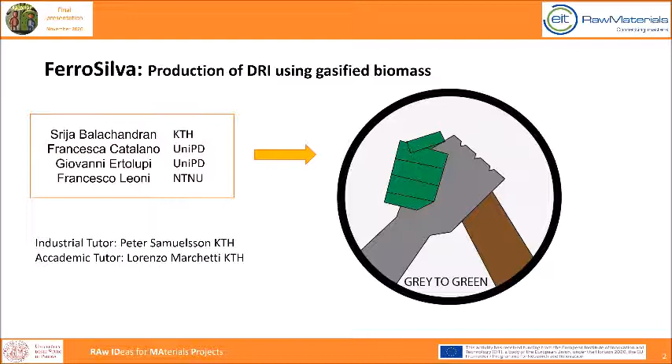So we are group 6, and I'm going to introduce you to the topic of our project, whose name is FerroSilva. FerroSilva is a project that has its origins in the Royal Institute of Technology of KTH in Stockholm. And the idea is to utilize the chemical properties of biomass to create a fossil-free iron raw material.

Steelmaking is the process of producing steel from iron ore or scrap. Today, there are two major commercial processes for making steel. They are called basic oxygen steelmaking, which has liquid pig iron from the blast furnace and scrap steel as the main feed materials, and electric arc furnace steelmaking, which uses scrap steel or direct reduced iron, DRI, as

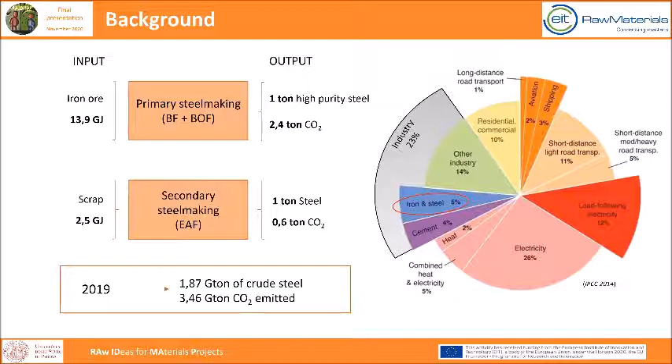the main feed materials. As you can see from this graph, the production of steel plays an important role in the production of carbon dioxide. The demand for steel is also growing, and the amount of scrap is not enough to satisfy this trend. Moreover, the steelmaking industry plays an important role in the world economy. It involves almost 100 million people, and it's worth 3.8% of the global GDP.

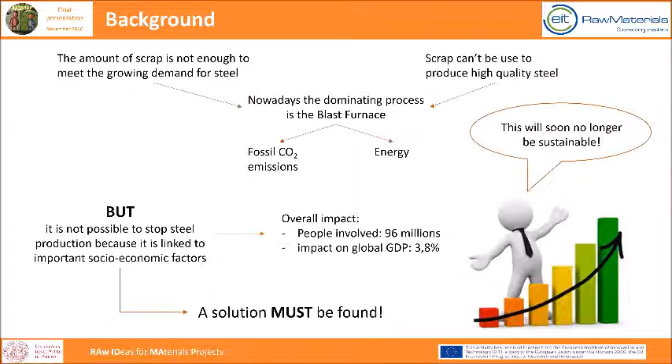In order to drastically reduce the overall CO2 emissions from the production of steel, the development of breakthrough technologies is crucial. Today, a large number of promising projects are ongoing in different parts of the world. One of those is FerroSilva, whose scope is to create a sustainable steel production process, preserving the typical advantages of secondary process, also in the production of high-quality steel.

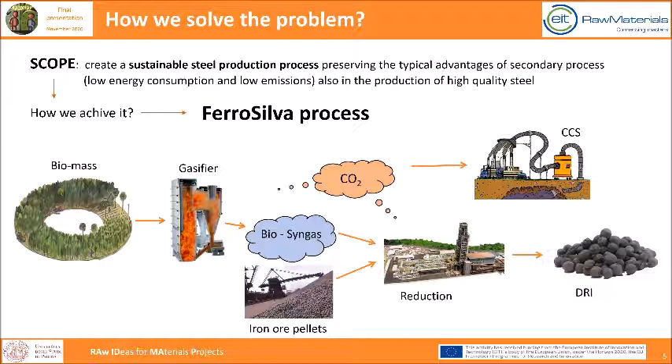By combining the gasification and reduction processes with carbon capture and storage systems, a carbon sink can be realized, and this brings to net negative carbon emissions. So the technology for the FerroSilva concept is available today, but the combination is new.

This slide gives an overview of the technology readiness level for each one of the processes employed in the FerroSilva process, which are gasification of biomass, reduction of iron ore to produce DRI using natural gas, and finally the combination of the two, which means reduction of iron ore to produce DRI using gasified biomass with integrated sub-processes.

We consider the first one, the gasification of biomass, to be at a level 8 of readiness. This means that the technological systems are complete and proven in smaller industrial scale. So given that the requirement for FerroSilva was around 100 megawatt, we believe that 8 can be assigned with a good level of confidence.

The second one, which is reduction of iron ore to produce DRI using natural gas, is currently at a level 9 of the scale. This is because the Midrex process is industrially proven, and it has been used for around 50 years using natural gas so far.

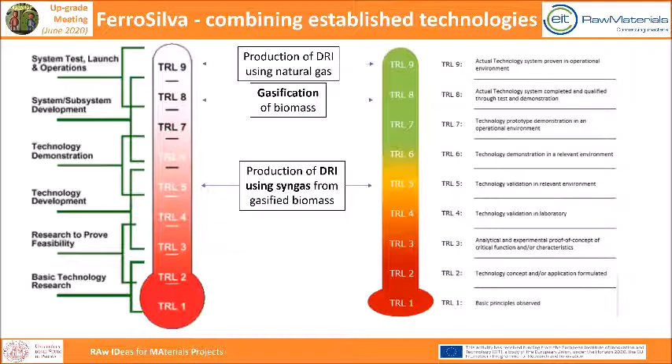So now I leave Francesca going ahead with the presentation. Please, Francesca. Thank you, Francesco.

Next slide, please. The choice of the gasifier was not easy, as there are many existing technologies, and it was necessary to find the one that allows us to obtain the syngas with the characteristics required to produce DRI. So, to do this, we built an evaluation matrix giving different weights to each feature in order to enhance the most important ones.

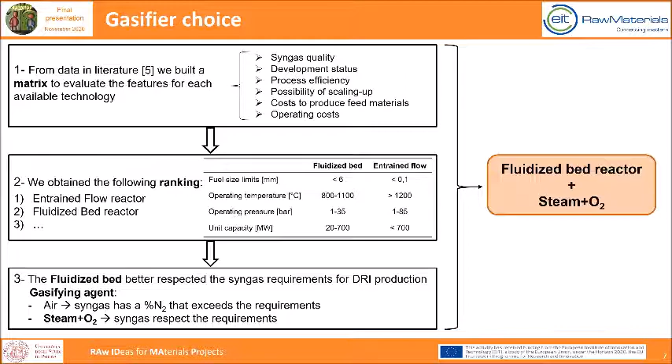In this way, we obtained a ranking of the technologies that allowed us to identify the two best technologies. We then determined which one was the most suitable by comparing them with the design requirements, and the fluidized bed reactor was the winning technology. Similar reasoning was used to decide which gasifying agent to use, and steam plus oxygen was the best choice. Next slide, please.

Okay, to make the reduction, we have chosen to use the Midrex process because it has a lot of advantages. It's the most common and consolidated way to produce DRI. And when combined with BECCS, it leads to the best net negative emission balance. And it's a flexible process since it has few requests on the gas quality.

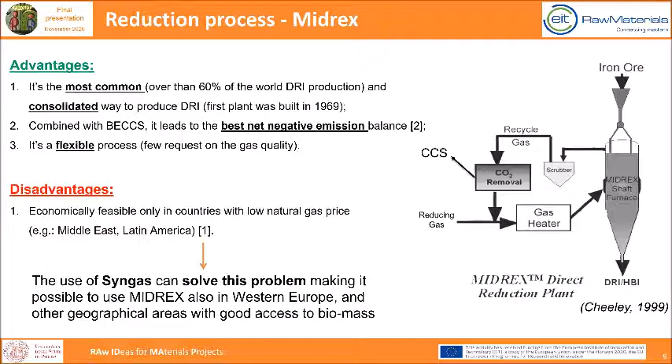On the other hand, it is economically feasible only in countries with low natural gas price, but the use of syngas can solve this problem, making it possible to use Midrex also in Western Europe and other geographical areas with good access to biomass. Giovanni, please.

Okay. We did this slide just to give the dimension of the plant we are speaking about. Our case study is about a 500 kiloton per year plant. But just to study the possibility of upscaling, we refer the model to the production of one of the largest steel plants in Europe. The production of 6,000 kiloton per year of iron, as it was in Taranto, will need a 12-times bigger plant.

In both dimensions of the plant, there are no problems related to the availability of biomass. Of course, a plant of 500 kilotons is preferable because it allows a supply of biomass at a short range and therefore lower emissions related to transportation.

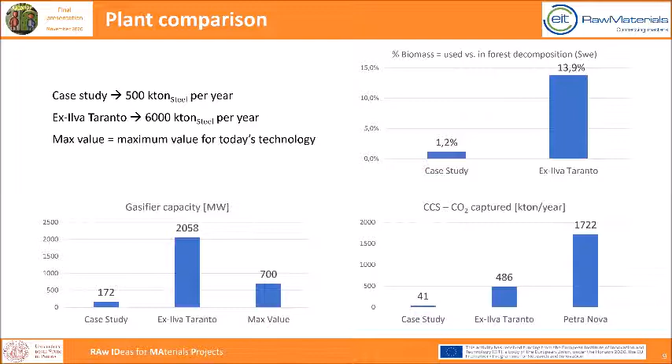The typical power of a biomass gasifier is some 10 megawatts, but in literature we found gasifiers up to 700 megawatts. It will probably be necessary to use multiple gasifiers in parallel to produce the amount of syngas required by a larger 6,000 kiloton plant. In both plant scales, the amount of CO2 treated by CCS is much lower than that processed in existing plants such as Petra Nova. Next slide.

Okay. Here we have a SWOT analysis, which is strengths, weaknesses, opportunities, and threats related to FerroSilva. Among the strengths, we can say that FerroSilva is a climate-friendly process that uses infrastructure already in place and leads to comparable cost to currently existing processes. In addition, FerroSilva utilizes biomass that is often considered waste.

About the weaknesses, we need to have a low carbon intensity in the collection and transportation of biomass. Another weakness is linked to biomass gasification, because the current scale is typically some 10 megawatts, but FerroSilva needs about 100 megawatts. Among the opportunities, there is the possibility to spread the process also outside Sweden, and the creation of a network between forestry and steel industries that leads to new business opportunities. Then FerroSilva can take advantage of incentives and legislation aimed at reducing emissions.

The threats to FerroSilva include that it might not be as lucrative as using syngas produced from natural gas, biomass versus agriculture, and the unsustainability of the process in dry areas due to the shortage of biomass. Next slide.

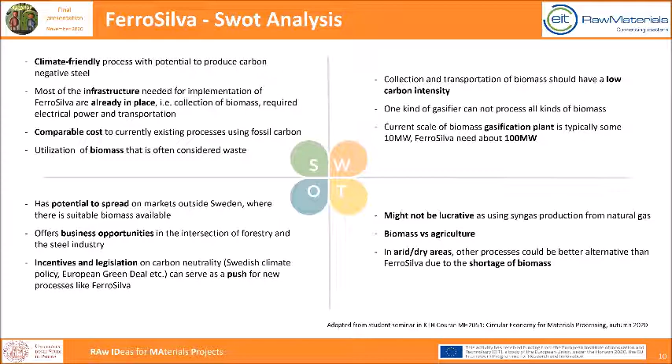Okay. To estimate the potential of the FerroSilva process, we made a model. We found out that the implementation of FerroSilva in a standard Midrex plant leads to an additional investment cost of about 150 million. But considering the savings related to the price of the raw material and the cancellation of the carbon tax, the payback period is about 2 years. Regarding emissions, from the graph on the right, we can see that FerroSilva can lead to a net negative CO2 balance. Okay, next slide.

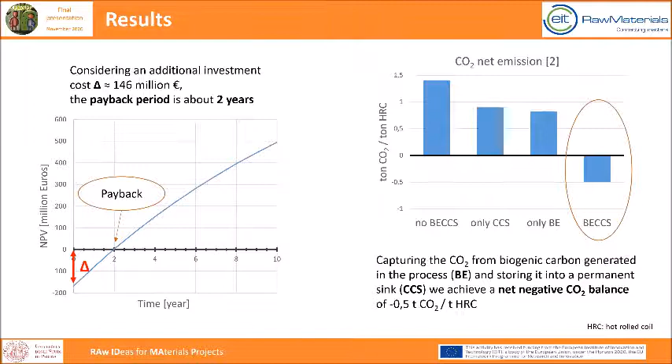Okay, about the risks of this project, we divided them into 3 colors according to risk level. Green is low risk and red is high risk. At the lowest level, there is the possibility of having a biomass shortage in the first period, but this problem has already been solved by including biomass suppliers in the consortium. The risks marked in yellow are 2. The first one concerns the need to find efficient storage places for the removed CO2, but it's not too serious a problem, because when injecting CO2 into the storage place, if it has some leaks, it's immediately noticeable.

The other yellow level risk concerns the difficulty of finding financiers to build the first plant, but perhaps increasing research can be a good way to increase investors' confidence and curiosity in this project. Among the most important risks, there is the possibility of not finding the right gasification process to obtain syngas with the desired characteristics, and maybe it will be necessary to foresee an intermediate stage between the gasifier and the shaft furnace to condition the syngas.

Another problem is related to possible methane emissions throughout the whole process, and this would put the negative emission balance at risk. To solve the problem, maybe better monitoring of emissions along the plant will be needed. Next slide, please.

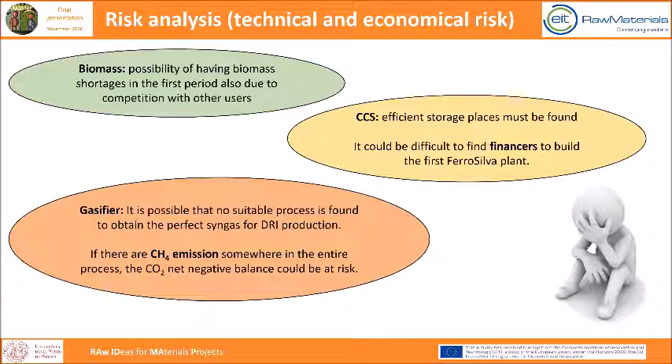In order to successfully develop a FerroSilva project led by the project management, the consortium should include a research institute to complete the study of this new process, like KTH, Chalmers Technical University, and IVL; equipment suppliers to build the plant, like Danieli and Midrex; and biomass and iron ore suppliers to feed the plant. For biomass, we have Sveaskog and the Farmers Cooperative, and for iron ore, the mining companies from Sweden and Norway.

And then the steel industry and steel users like the automotive industry should be included in the consortium too, because they are the final users of FerroSilva products. And they are interested in this project because it allows them to obtain a clean iron source, a low impurity rate in steel products, and negative CO2 emissions. Next, please.

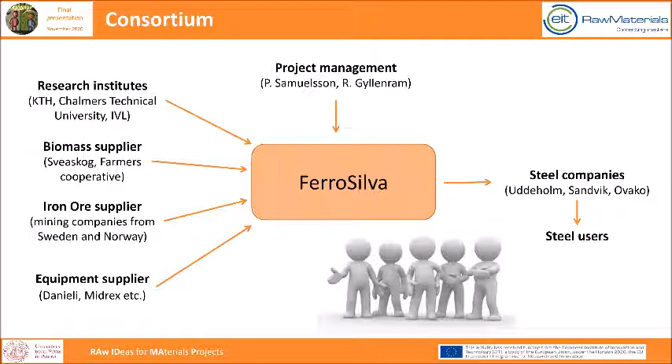At the end, why should EIT Raw Materials fund this project? Because innovation in the steel industry has a huge impact on society, economy, and environment. The utilization of CCS technology follows the IPCC guidelines for the decarbonization of big industries. This process leads to a net negative balance of CO2, and it's a combination of technologies that are already proven on their own, so there is a low risk bound to innovation. For this reason, the project has all the credentials to be an excellent investment. Next.

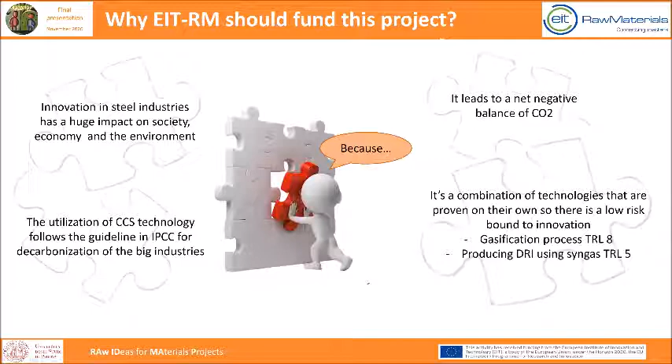Here are some sources we used, and at the end, thanks for your attention.